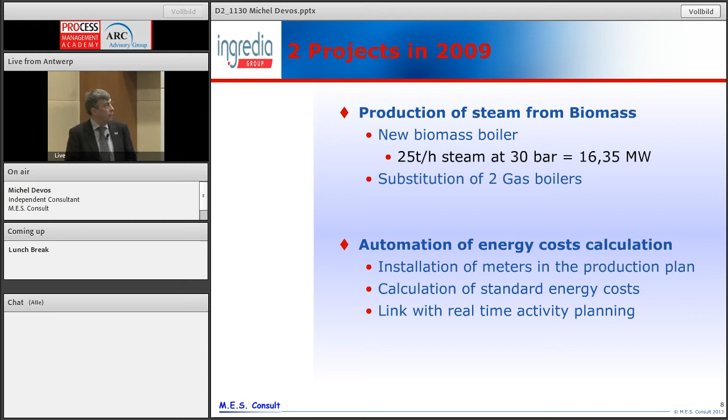The biomass steam boiler they installed is the largest biomass steam boiler in Europe for the food industry. It is producing 25 tons per hour of steam, burning a little bit more than 5 tons of wood per hour. And you have the dimension of the building which is covering both the boiler and the warehouse for the wood, because with 5 tons per hour, you need space to store the wood before it's burned.

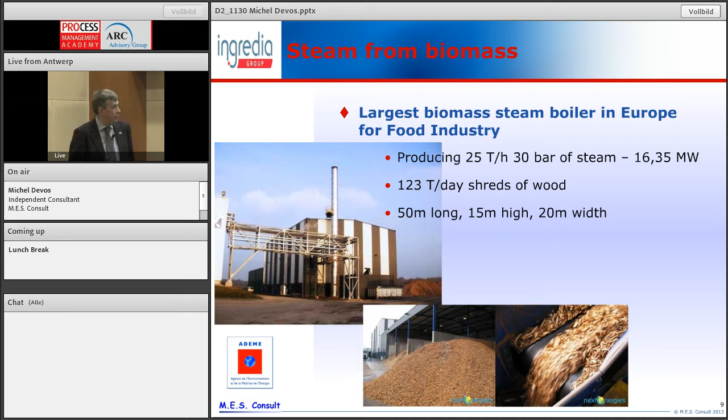And here is a quick description of the repartition of the steam network. In addition to the installation of the new boiler, they took the opportunity to install also two heat exchangers, steam-air exchangers at T and R equipments, in place of burning gas directly into air to heat the air.

One thing about this is that in reality the wood steam boiler is dimensioned to support normal operations, but it is not dimensioned to support extra or overloads, because, maybe you know or not, cows are not producing the same quantity of milk every day. An industrial cannot manage the way the cows are producing milk, but they have to treat all the milk produced every day. Then they have various quantities to treat, and some days they have to manage more than normal activities. It means that they are continuing to use one of the gas boilers they had before as the emergency input for steam.

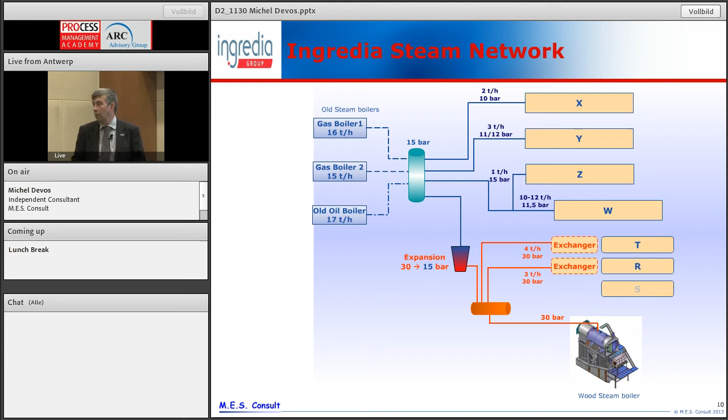Some benefits of the biomass. Why did they invest in this? Because it's not a small investment. In fact, the major benefit is the gas substituted by wood in terms of cost. They substitute more than 100,000 megawatt hours of gas. Knowing there is a difference between the price of 1 megawatt hour coming from gas or from wood, they make the benefits there. We talk about something like 10 euro per megawatt hour as a difference.

And the difference is remaining stable along the years. The wood is increasing in the same way gas is increasing. And they have also some benefits for the environment. They save more than 22,000 tons of carbon dioxide per year.

Now there are some risks and issues related to working with such a boiler. The management of the boiler is an important point, because a wood boiler has a response time slower than a gas boiler. When you talk about seconds as a response time for a gas boiler, you have to talk in minutes. With some equipment such as an evaporator, when you start an evaporator, you have a quick increase of consumption in steam.

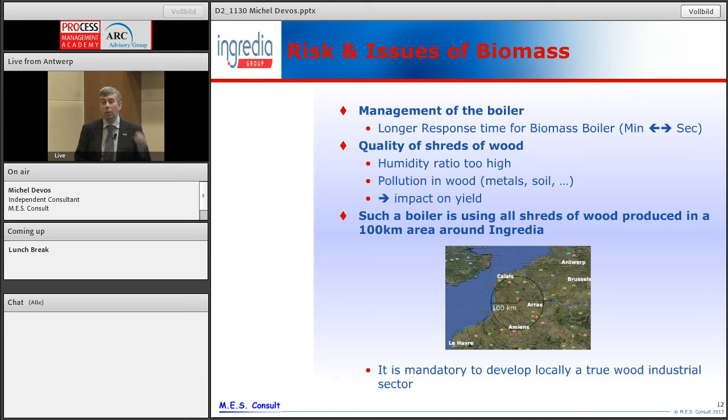And another point, not the least one, and not directly for INGREDIA, but for other industrials in the area. Such a boiler is using all the wood produced in a 100 kilometer area around INGREDIA. If industrials are not working with the local wood industry, and we are not talking about bringing wood from Canada or Brazil, it is not possible to install a second biomass boiler in the 100 kilometer area.

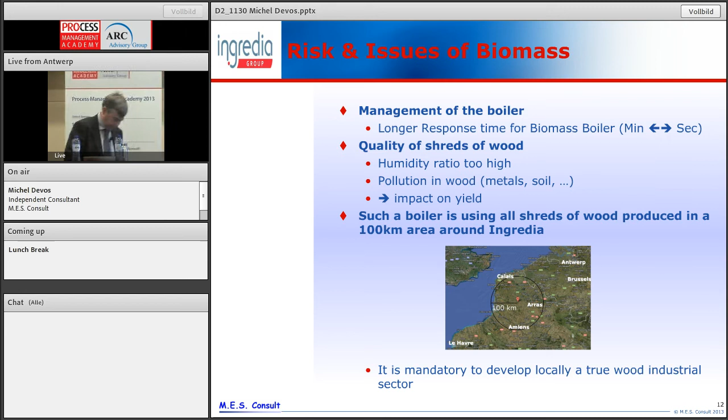Now, let's move to the second project, talking about this standard cost. When you are preparing your budget, everybody is talking about raw material cost, resource cost, but few are working on energy. INGREDIA is working with energy cost when they are creating the budget and when they are creating the selling price of the product. They know exactly how many euros are due to energy in a selling price.

And they created an Excel spreadsheet where they have the different products and the cost of producing each product in electricity, steam, cooling, water, compressed air, gas, and wastewater. And for some generic operations, they have the same kind of calculation. Packaging, for example, is the same price for any product. They know that for packaging, they have a cost, a quantity of electricity, a quantity of cooling, and so on.

And they have also the cost of producing secondary energy. What is the cost of producing steam? And in this case, the graphic is not correct because they have two lines for steam: steam produced by gas and steam produced by biomass. Compressed air, water, cooling, and so on. And after this, the management, the finance department can translate this into euros according to the contract they have with the electricity producer and so on.

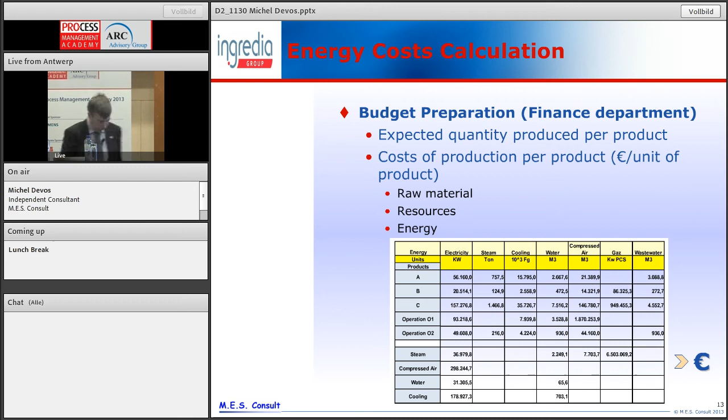It was, let's say, administrative work to prepare the standard price. Now they have to go a further step to collect information to verify that the numbers are correct. And to do so, they install some energy meters when required and store these values in a database. In this case, they made the choice of low-price meter systems because the goal was not to make invoices, it was just to have a good value, to see the evolution and to see if it is correct.

I have one personal tip here, and the personal tip is that in your process you could use virtual meters. You have in your PLC a big amount of data. We were talking about big amounts of data earlier with Microsoft. You have a big amount of data. You could transform this data into energy information.

Let's take the example of a motor. Again, a motor. You have the power of the motor. You know in your process how long the motor is running. And you have immediately the energy consumed by this motor. We're talking about a constant speed motor, things like this. But you have a lot of examples where you can convert a process parameter into energy consumed. And this reduces the cost of implementing energy meters.

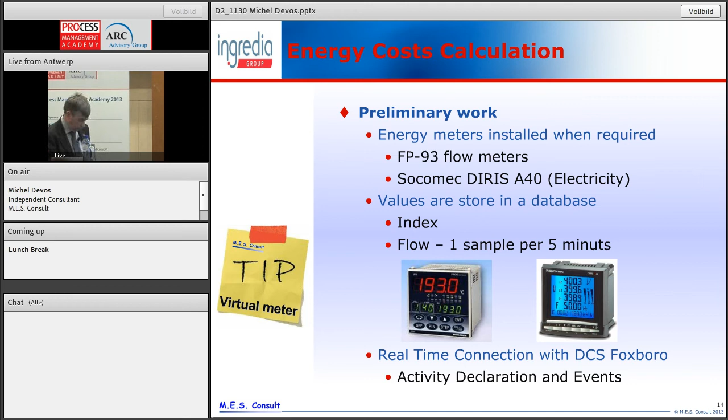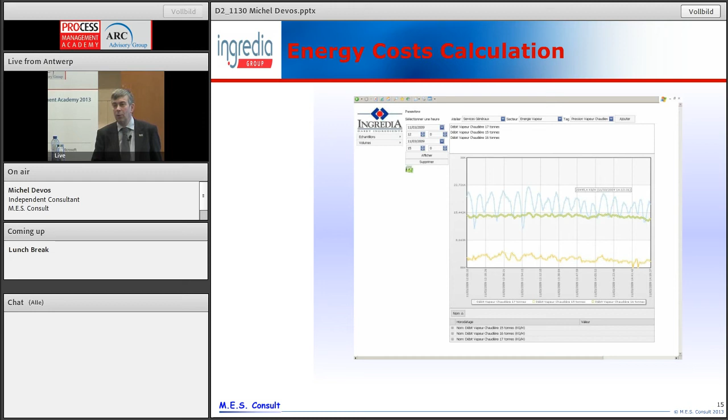Oh yes, this is just to explain and to show a trend, but it is a standard trend you can have from any product showing the evolution of your flow of energy.

Now, you have the numbers, you have the system to collect information. You could go into activity-based costing. What they did is to look at what they are doing in the production facilities and define every type of activity. What is a production order? It's a changeover, a cleaning, a closed period, a meeting, a maintenance, with the particularity that meetings and maintenance are activities that suspend a production order.

And you make the link between those activities and the energy consumed, and you create a report or a new section in your production report where you select the type of activity. What is new is that it is not only production orders. Then you need to make reports on other activities as well. You have to store the quantity of energy, the quantity of units of product for this last activity, and the family of the product. With this, you prepare your analysis to do better in the future.

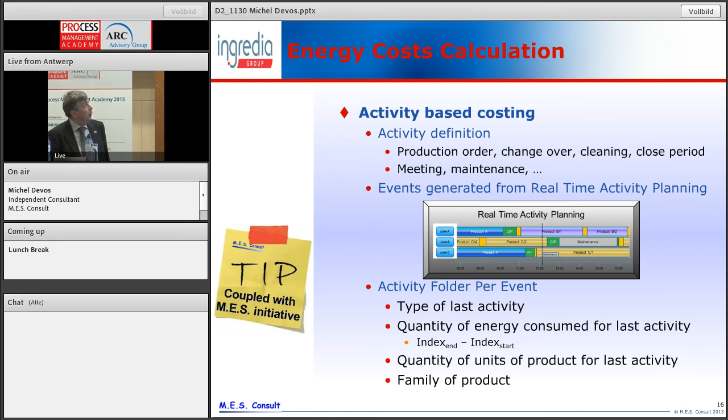Okay, then they implemented those deviation alerts. And this also makes the production people aware of energy issues, because they have in every report: you're not good in this last production order, you were not good, or you are better, why? Because I stopped the evaporation line earlier. But it's also a good way for finance people to understand what happened.

Because let me tell the story where the finance director says to the production one: last month you were good in energy consumption, the invoices are 20% lower. And production said, yeah, but we had 2 lines stopped for 1 week. In fact, in this case, the energy cost per unit of product remains exactly the same. Maybe higher.

Then it's an opportunity to make a monthly review of your energy cost according to the production. And because it is in the production report, you know exactly what happened 3 weeks ago. You can put in place a strategy to select the right energy to produce a secondary energy. And you could measure exactly the impact on the selling price of a modification in the price of the energy. And maybe this will introduce a need to invest in reviewing the process engineering.